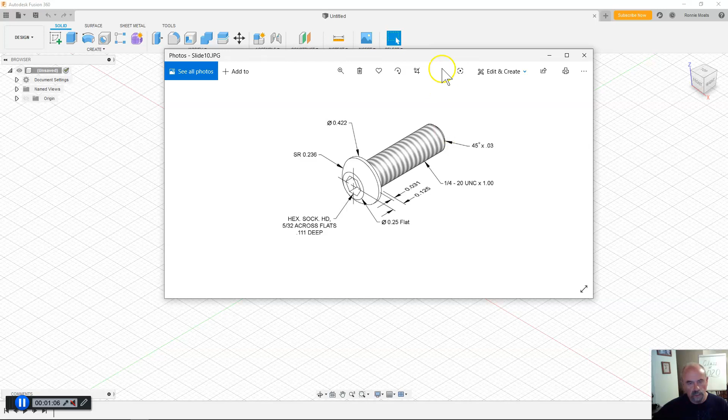So we're going to start this by creating a new part. Design. Okay, where am I here? I'm going to go right to save, because I don't want to lose it like yesterday.

Axle cap screw, or axle bolt. Let's just go with bolt. Axle bolt.

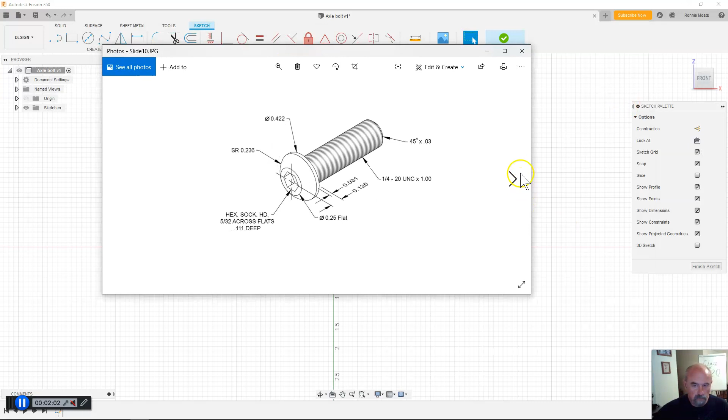Okay, so the first thing we're going to do is put a sketch on here. Start on the front side, and let me bring this back over again. Best way to make this is to draw the profile and then revolve this around this.

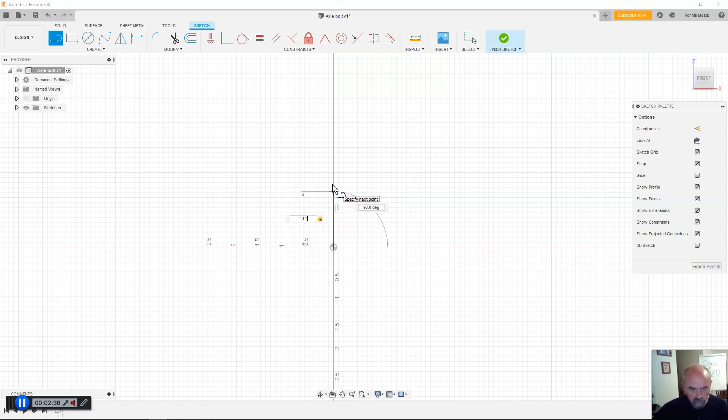So remember, every place that there's a diameter, what we're drawing is half of it. So we're going to start out with a line at the center, and we're going to come up 1 inch, 0.125, an inch and an eighth, 1.125 inches. Hit enter.

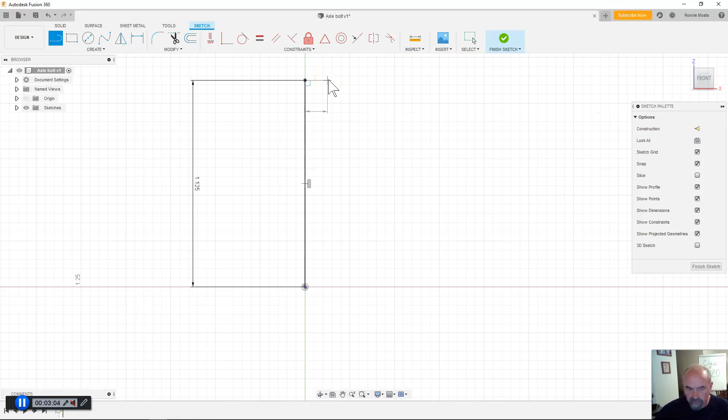Let me zoom in on this a little bit so it's easier to see. And then I'm going to draw a line from the top of that line over 1/8 of an inch, which is 0.125. Then I'm going to draw a line at the bottom, straight over 0.125, or 1/8 of an inch, as such.

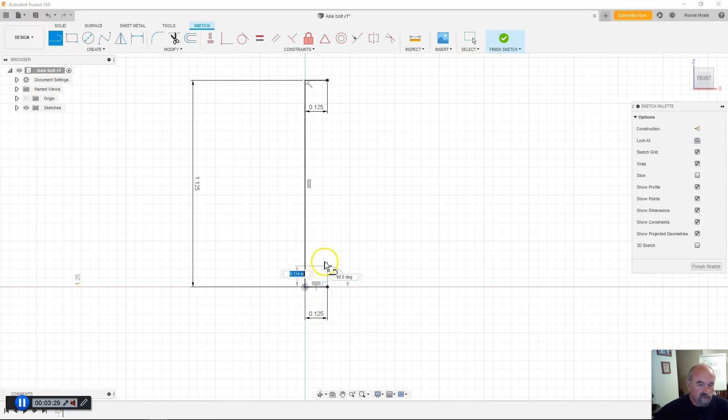Next line, where we left off at the bottom, and that's going to come up 1 inch. As we stated, that was 1 inch from there to the bottom of the fastener. Now,

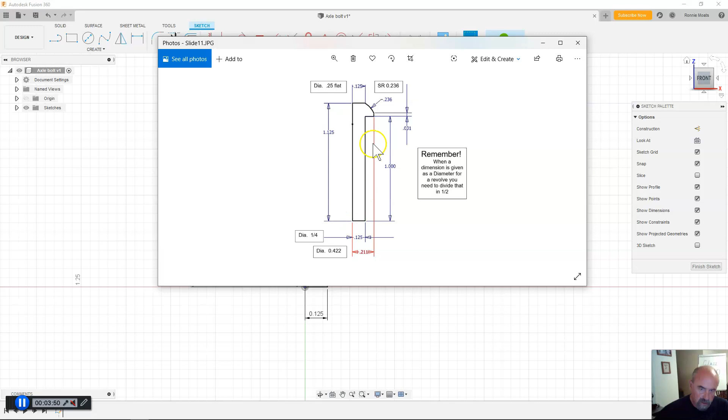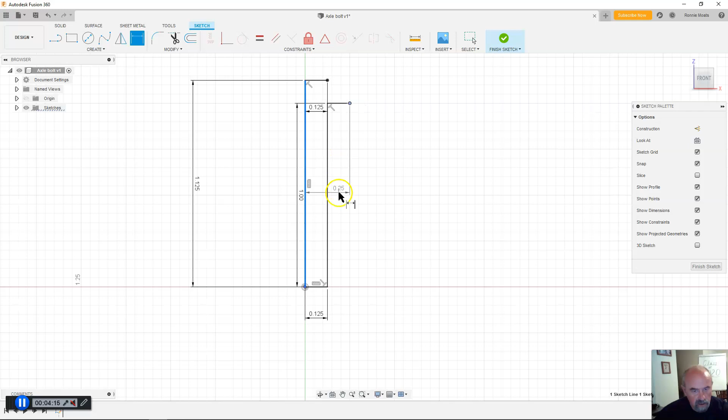Looking at this, I can see this in red. It says that this has a diameter of 0.422 from here to the outer ring there. So I'm just going to draw my line from there out, and then click, hit escape to release myself out of that tool, and then I'm going to dimension it from the center line to the tip of that line, and that is what I want to be 0.422 divided by 2, or just 0.211.

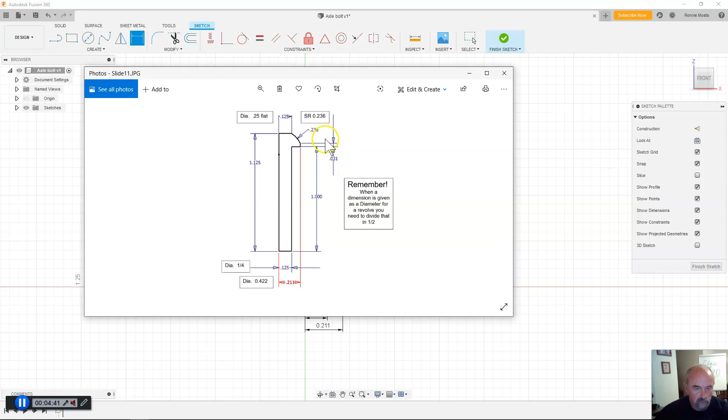Now, up here you'll notice we have a dimension of 0.031. That's that little lip on the edge of the screw. So we're going to draw a line from that end straight up, 0.031.

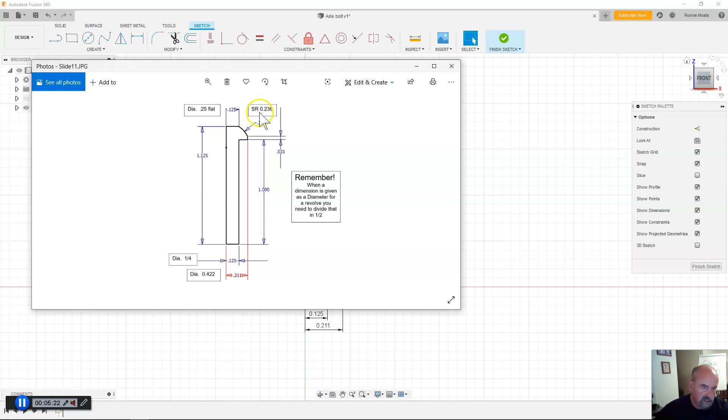So now, this sphere, if this was here, all the way over, this SR means that it's a spherical radius of 0.236 inches. So, in order to do that,

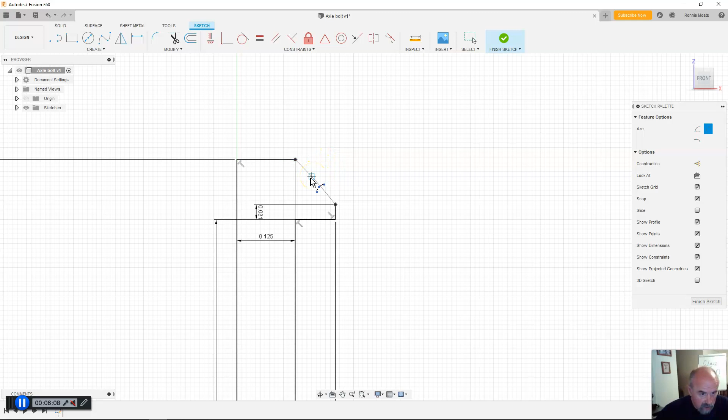I'm going to want to come up here to the tool ribbon, click on Create, go to Arc, and do a 3-point arc. What that'll allow us to do is to click on the end of the line there, the end of the line there, and then we can just drag either negative or positive. But what I want to get is very close to a straight line, but I want it just to go a little tiny bit to the outward, and then click on that.

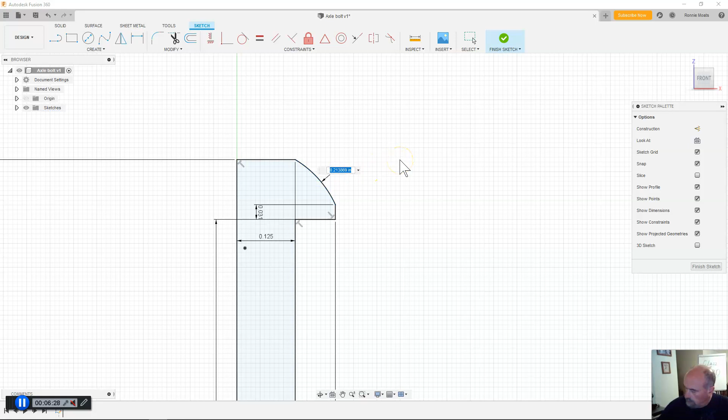That way when I dimension this to 0.236, it will automatically find the center point needed for that radius. So we didn't have to find a center point for that. All right.

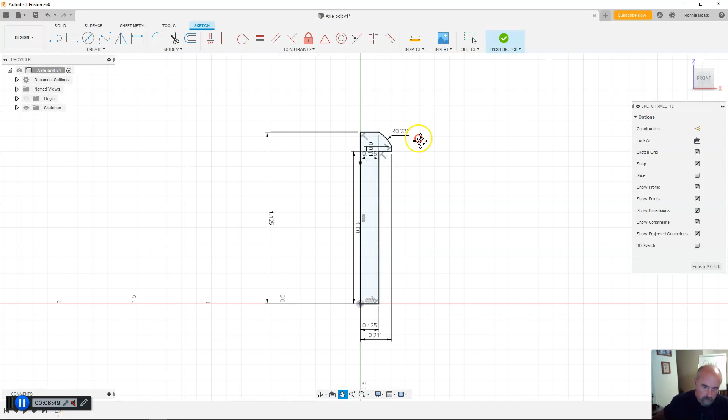Okay, next thing we're going to do is finish this sketch.

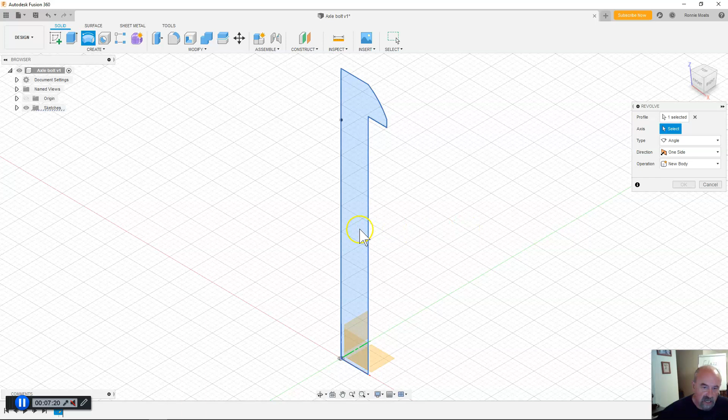Come up to Create and choose Revolve. Now the profile is not blue because it's already been selected, and there's only one profile there, so there's no option. It's automatically jumped to the axis, so we have to select that. So I'm clicking on that line and then clicking OK.

Now the next thing that we're going to want to do is put a sketch on the top there. Next thing we need to do is put the hole in the top for the wrench to go in, an Allen head wrench or hex socket wrench. It says it's 5/32 of an inch across the flats and it's 0.111 deep.

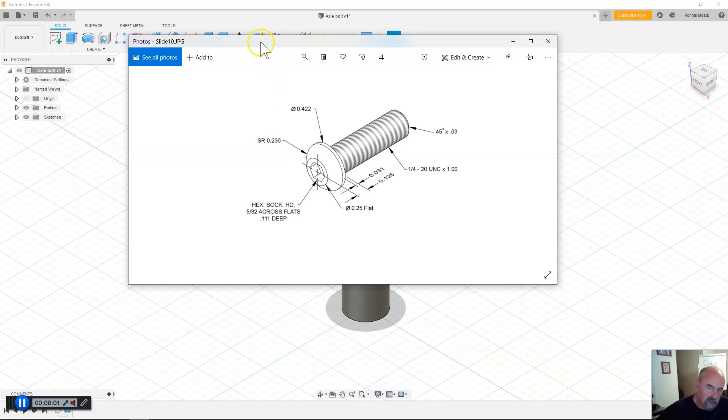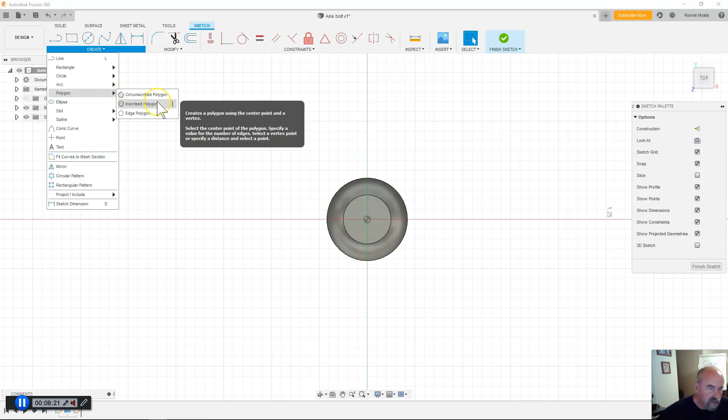So we're going to put a sketch on the top there. Create sketch, put it on the top, and then come up here to Create and find the polygon tool, and we're going to go with the inscribed polygon. Come over to the center, make sure that you have 6 chosen.

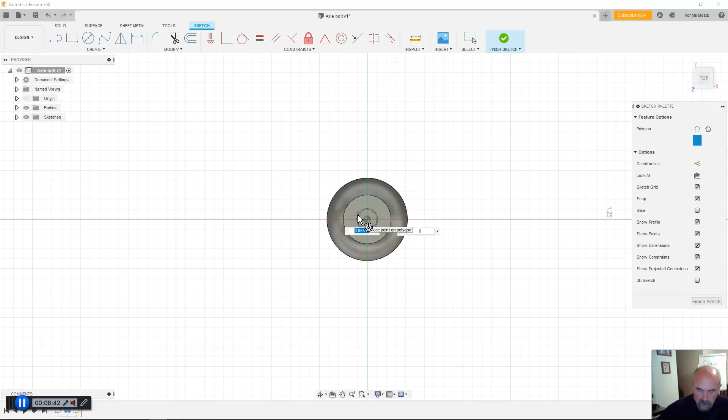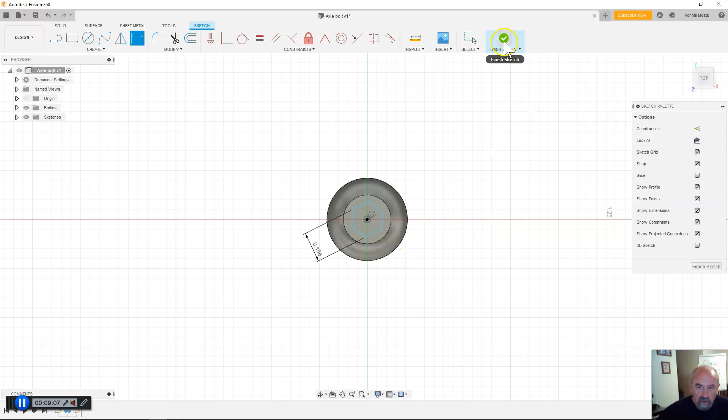Just go ahead and click somewhere and then dimension so that we can go from flat to flat and set that to be 5 divided by 32, which is 5/32 of an inch. Go ahead and finish that sketch, and then we're going to come up to Modify.

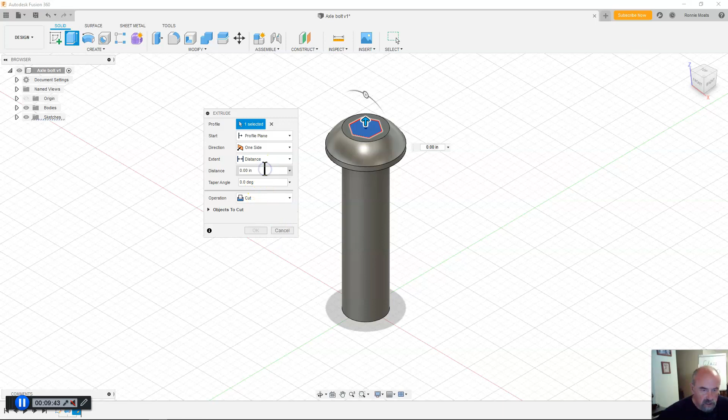What we would call, this is the first time I just noticed that, it's not called Extrude, it's called Press-Pull. So we're going to press-pull the polygon. And instead of new body, we're going to choose cut. Distance, I guess we have to go with negative 0.111.

Going back and forth from Onshape to Inventor to Fusion, the differences between using all 3 softwares sometimes throws me off, where one is positive and the other one is negative and the other one you just drag. So the next thing we need to do, let's take a look at our drawing again here, is put

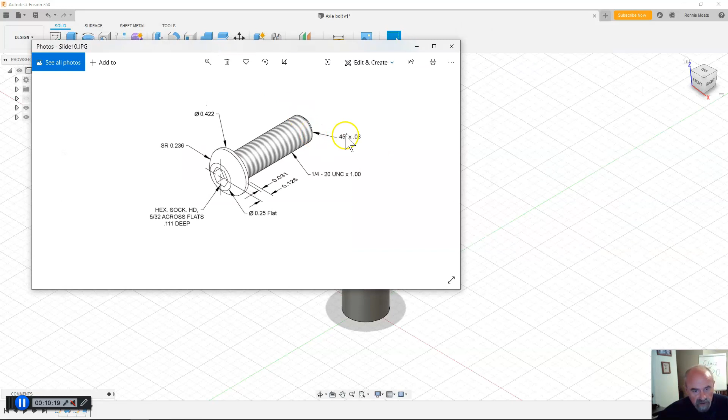this 45 degree by 0.03 chamfer on the bottom so it's easier to start the thread. And in order to do that, I'll flip this thing over

and modify, chamfer. Instead of equal distance, I want distance and angle. I'm going to click on that corner. And there they are, that's what I was looking for, was the distance and the angle. You got to click on it first. 0.03 and 45 degrees.

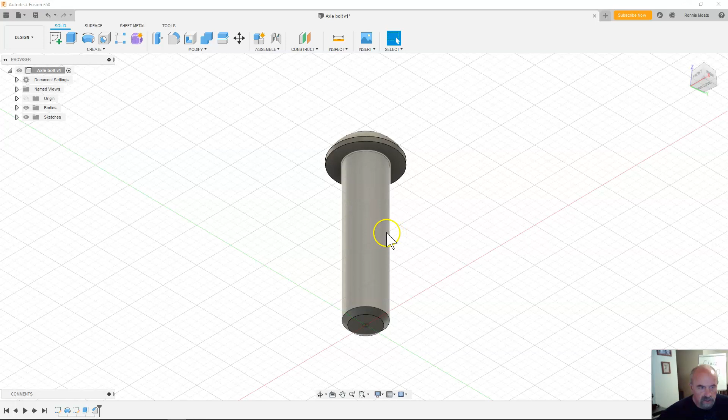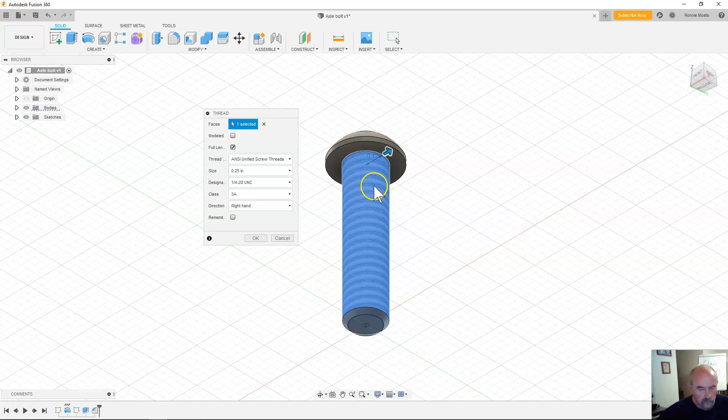And there we go. Okay, so the next thing we want to do is put our thread on this surface here. Come up to Create in the tool ribbon and come down to Thread to add an internal or external thread. We're going to click on the outer surface of that, and it recognizes that we already have the diameter of 0.25, so it's putting that up.

We could choose a quarter 20 Unified National screw thread. I don't know what UNS 27 is. Quarter 28 is Unified National Fine Thread. They don't have pipe thread here. So we can choose right hand or left hand thread, and you can see it changes the direction. The standard though is right hand thread.

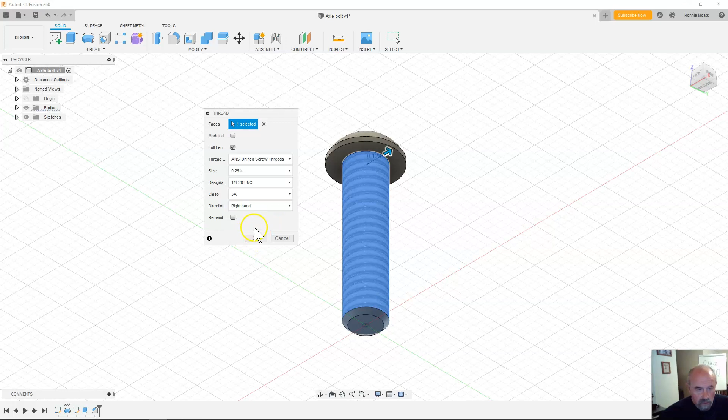Click OK, and those are our threads. That is our completed fastener. Click Save.